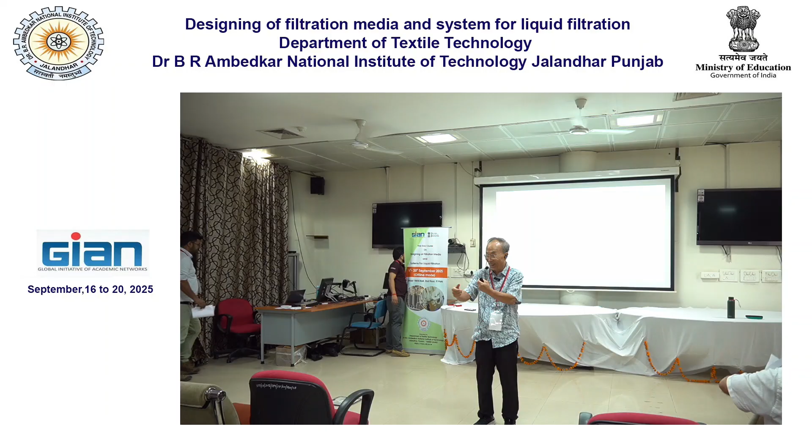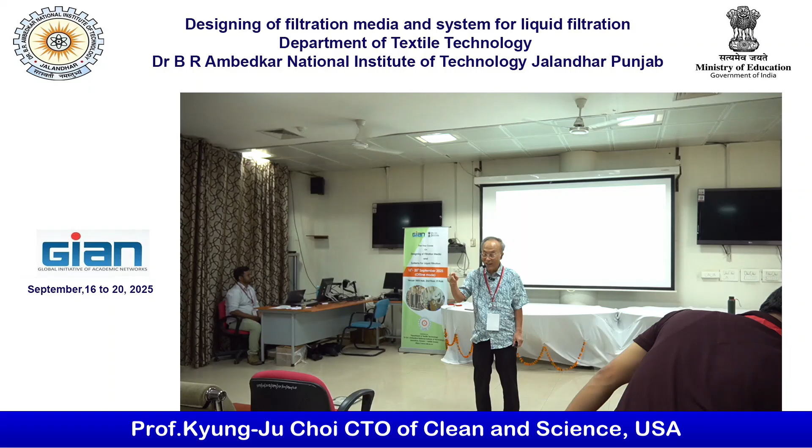But one thing, when I look at it, it's really quite interesting. Why? The route that I take to come to Jalandhar: US to Europe, Paris, and then to Jalandhar. I don't know why they are not looking at the other side of it, which means US to an Asian country, and then Jalandhar. Well, distance-wise, it's the same. However, there is not that type of route. So if that were available, then probably I would take that one.

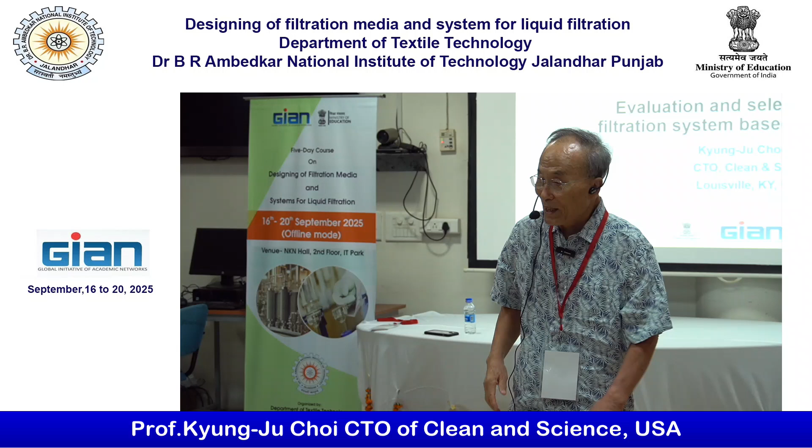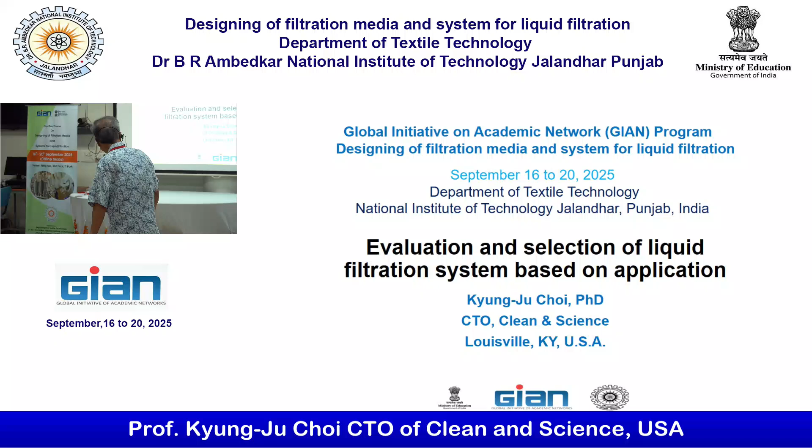Okay, today, this is really not a short kind of lecture, because it's evaluation and selection of liquid filtration systems based on application. However, I have only a small area of expertise, not all of the expertise. There is no way you can do it. So we're going to cover the areas available in liquid filtration. That's the first part of it. The second part, that is quite interesting, I believe, interesting to you.

Have you heard of MBR, a process for wastewater treatment? Have you heard of it? Membrane bioreactor. So we're going to go over that. There are also other recent technologies, so we're going to go over recent technologies being applied in wastewater treatment. I don't think anyone has covered MBR or some of the newest technology. That's why I told you yesterday you're lucky, because you're going to learn the newest technology available.

Then how do you select a liquid filtration system? This is the filtration system. First, you have to define the application requirement, the type of water or liquid, whether it's water or chemicals or food, beverage, pharmaceutical. The water: potable, wastewater, seawater.

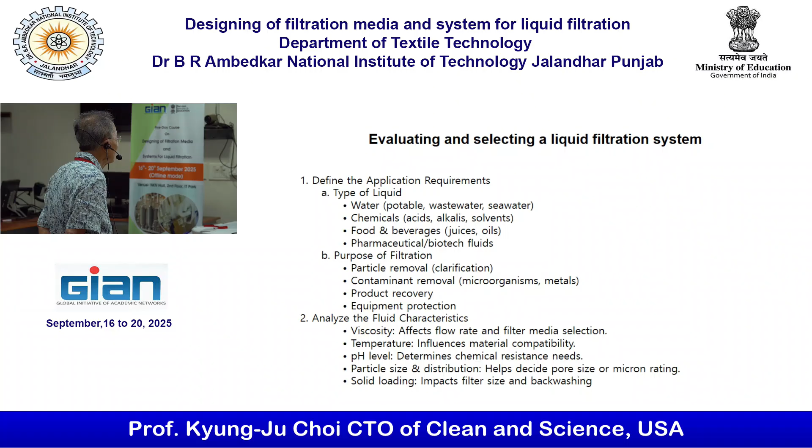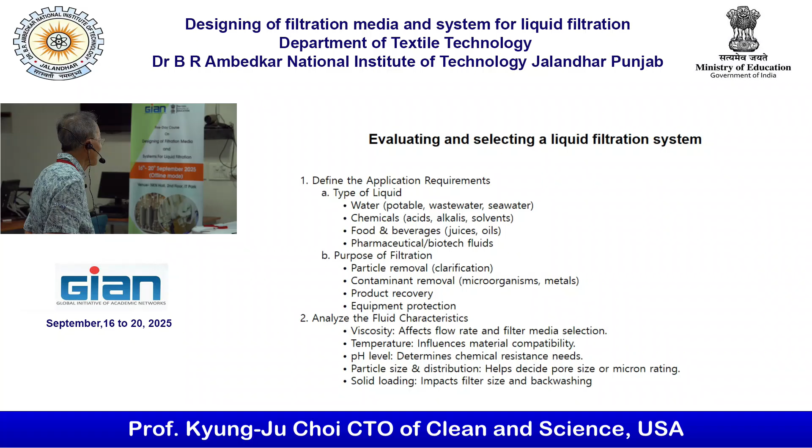And then third one, determine the filtration requirements. Certainly this is efficiency related. And flow rate is important. The operating pressure, well, pressure and flow rate, are critically important. Compared with air, for liquid the pressure is a really important parameter. Just like the previous lecture, is it continuous or batch? Then how can we clean the system itself? That's the important part of it.

And number 4, select the filter type. What type? By configuration: bag filter, cartridge, self-cleaning, or membrane filter, micro or ultra, cellulose depth filter. And then mechanism: surface filtration, depth filtration.

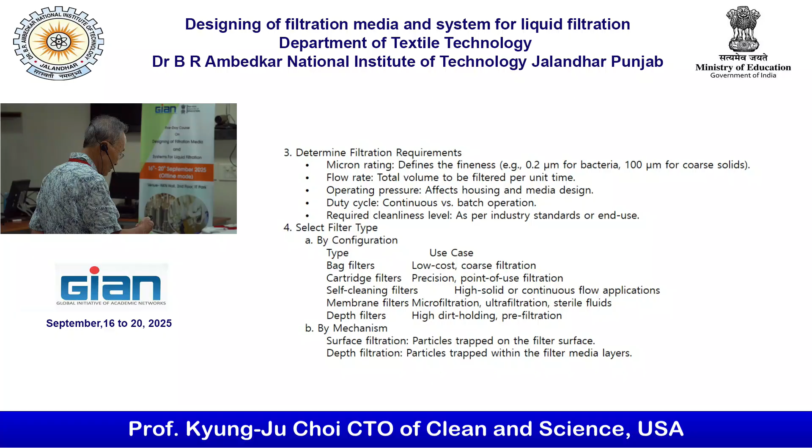Now, fifth, material compatibility. This is quite important. Compatibility with the solution that you want to use. When I worked for Cummins Engine Company, we tried to develop lube oil filter media, also gasoline fuel filters, hydraulic filters. Then you have to look at the compatibility. If it dissolves a little bit, then you have trouble. Cooling water is trouble. Cooling water actually has really high alcohol content. So the alcohol dissolves some of the materials, organic materials. So compatibility is quite an important factor.

And then what type of housing? The operation and economic factors. The economic factor normally comes first, whether this one is expensive to make or not. Certainly the maintenance issue, change out, disposal. Now disposal is a big issue. Luckily, in the US, we are still dumping it in landfills only, because land is huge, but in India, I doubt it. So disposal is a big issue.

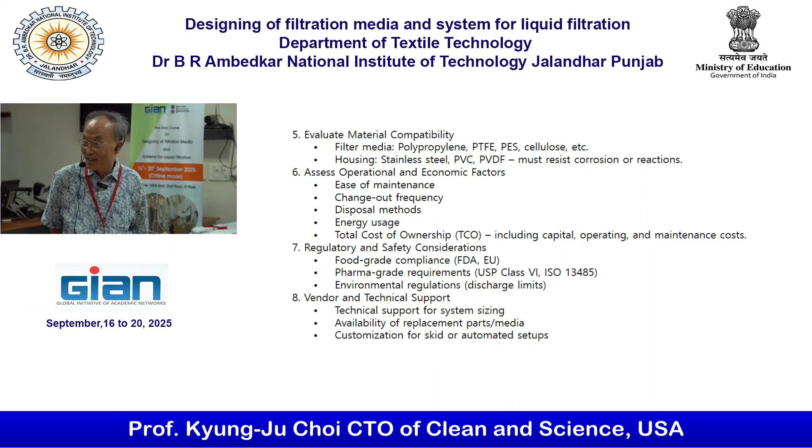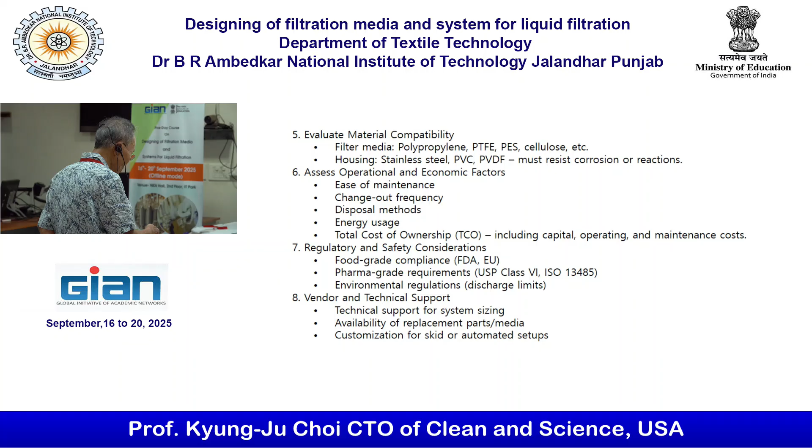And then this one is an important factor, regulatory and safety considerations, whether it's food grade, pharmaceutical grade, environmental regulation. Currently, there are so many regulations on water and everything. Another one is vendor and technical support. So these are all necessary items to look at. Here, evaluating liquid filtration by application. For bag filters, the cost is really low. What about cartridge filters? It's moderate. Sand filter, quite low.

This afternoon, tutorial 2, I'm going to start with the sand filter, the example of sand filter. I don't know whether you have the copy of the ebook. Do you have it? Not yet. Not yet.

So it starts with the sand filter, Fuji Mountain. Any person who actually visited Fuji Mountain in Japan? See, I traveled there several times because I have a project with them. That's really close to Fuji Mountain. Around that area, there is a bunch of so-called clean water.

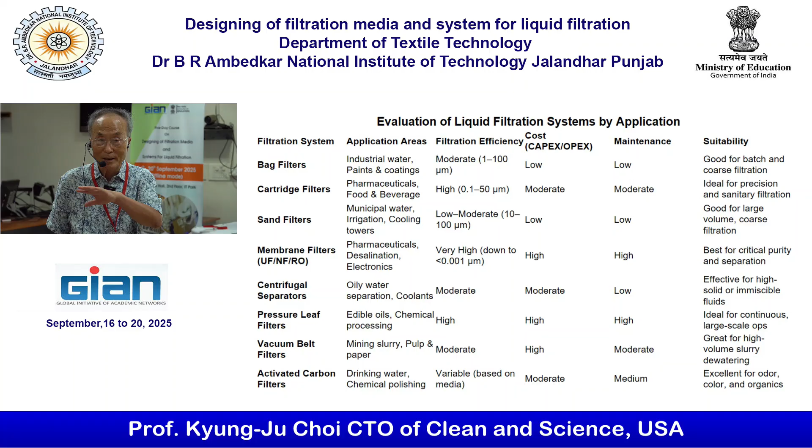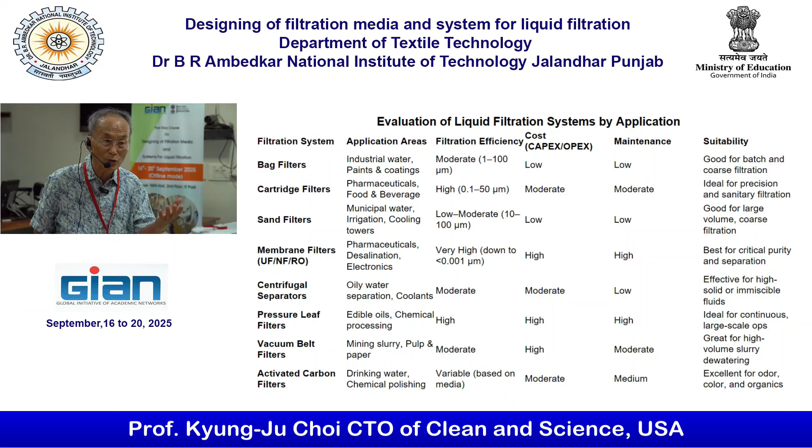And then sand filter. Sand filter is the original filter material, but we're still using it. And the membrane filter and centrifugal separator. However, the bad part of membrane is cost. Cost is quite high. There is one lecture about the membrane. I'm actually looking at the manufacturing side of it, how we can produce the membranes. There are several different types of membranes, so we want to go over how they can manufacture something like that. Centrifugal and pressure leaf.

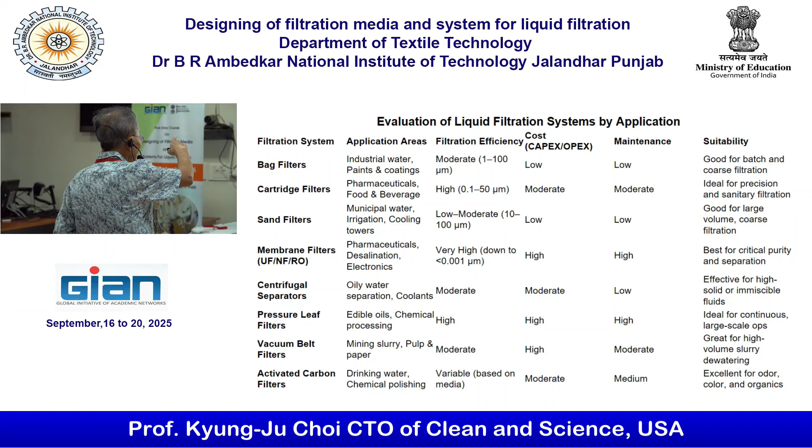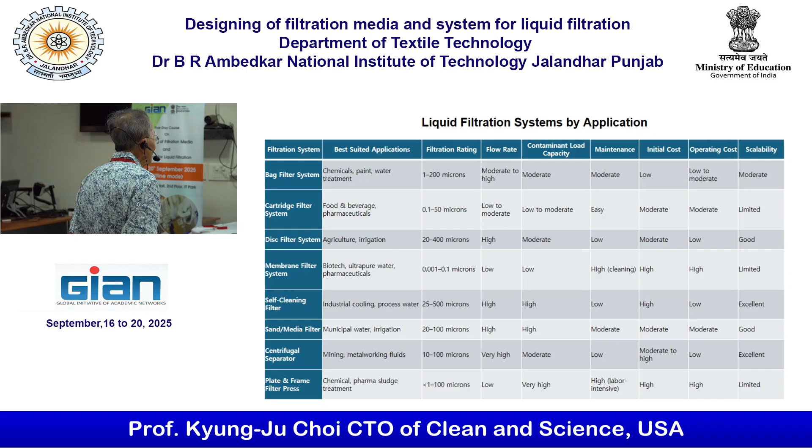Vacuum belt. So application area, industrial water and pharmaceutical, you can look at it. This chart is quite handy. If you like to design something, I don't want to go over every bit of it, but once you have this slide, if you have a project, you can look it up and get the right answer. This one is a little bit different. This one has the operational cost, scalability, flow rate, and filtration rating as well.

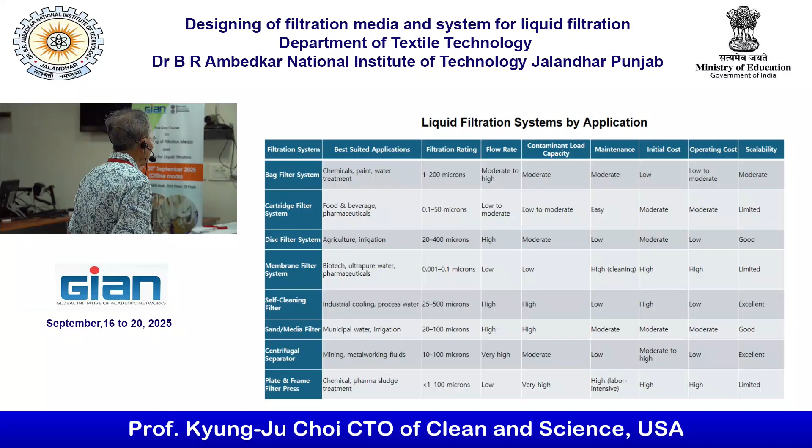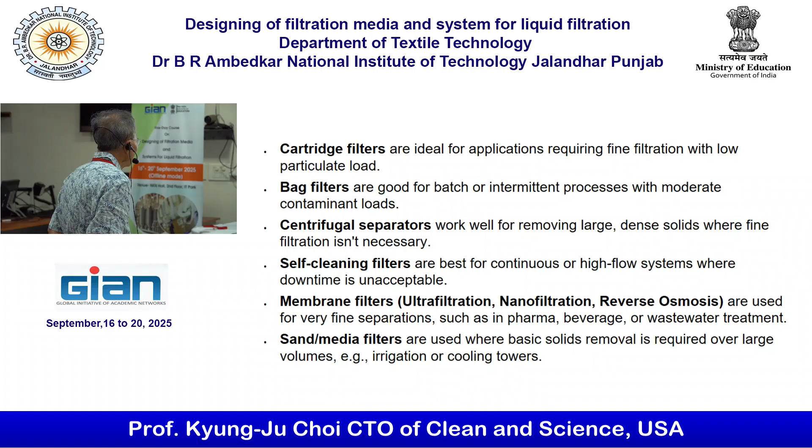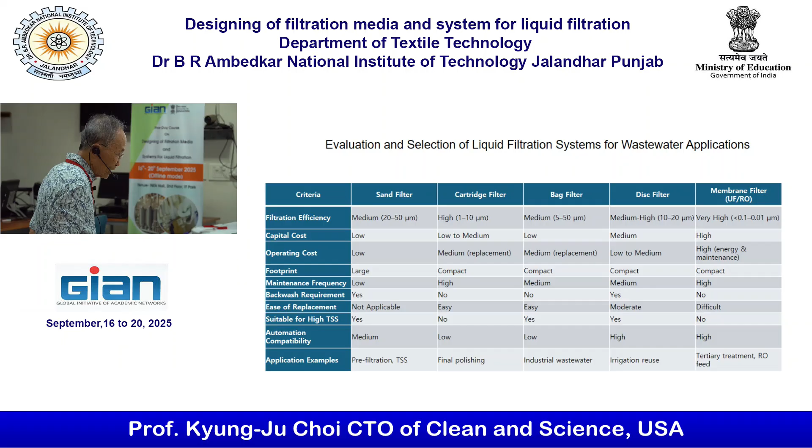Pre-filtration, and final one. I'm going to skip two. Selection of liquid filtration system for chemical plant application. The efficiency is an important one, solid handling and flow rate. Chemical compatibility is quite important. Here, footprint, the carbon footprint is quite a buzzword right now.

Do you know what the carbon footprint is? What is that? Carbon dioxide that is being emitted. It's the amount of carbon dioxide that is being emitted in each activity, let's say. Yeah. And it's expressed in tonnage. Yes, carbon footprint is currently the buzzword. Disposal is a big issue. So also, I'm going to talk about sustainable filter media development.

But surprisingly, the carbon footprint is quite a big issue in Europe and Asia. However, in the US, we are not actually paying much attention to the carbon footprint. But in Europe it's a big issue. Also, the Asian region is the same thing. But since I'm living in the US, we really don't care much. Can I ask you why you don't care about carbon footprint? Every area, I'm going to talk a little bit about it. Every area, in US, certainly.

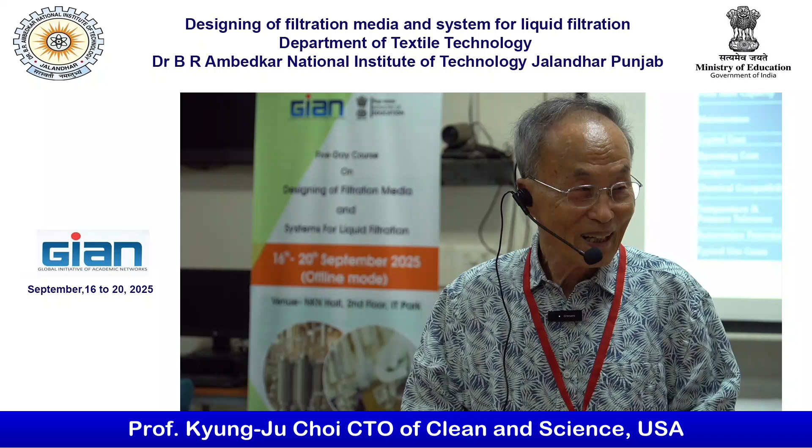US consumption for energy is much higher. So why do they project that there is a problem? The issue is that in the US, even inside the room, they are using air conditioning always, even though outside climate is quite good. But in India that will never happen - if the outside climate is good, no one will use the AC. My son is living in US, he is inside the room and the AC is running continuously, but outside climate is quite good. That will not happen in India where energy cost is very high. So they don't want to show their energy cost, because the more energy consumption, the greater the problem with carbon footprint.

Yes, that is the weak point - they don't want to show their weak point. And they are the major consumers, the major consumption for energy.

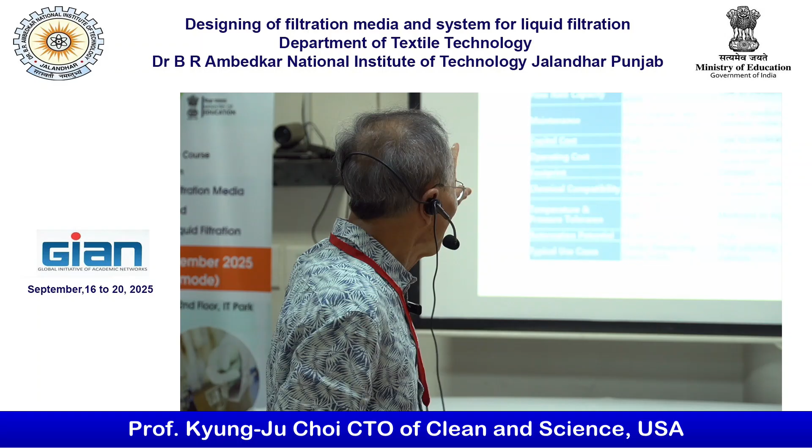But India also has a problem, particularly in the environmental part. India is lagging far behind. China improved a lot with time - initially China was at the top, but now China has improved a lot, and India is behind, if you look at the environmental part, water pollution, air pollution. That is actually a big part of the evaluation and selection of the liquid filtration system. You have to follow government regulation first. In the US, we don't have a lot of restriction, but India is different.

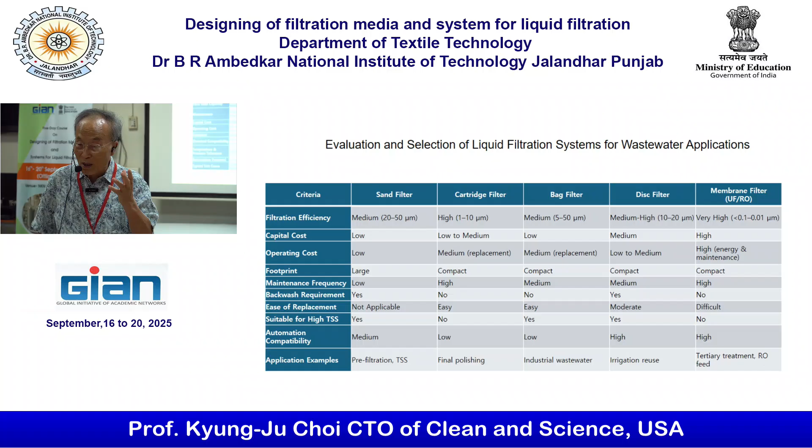Last time when I was here, I talked about the PTFE, ePTFE membrane. But one professor asked me, 'ePTFE is one of the PFAS, which means what they call everlasting material - there is no way you can degrade it, it's not degrading, staying forever. Also, it has some bad material coming out that can harm the human body, something like that.' But actually, I never heard of something like that in the US. When I was speaking about PTFE, one professor asked me, 'this is bad material in the future.' I didn't understand that, but still, if you don't have PTFE or ePTFE, then you get big trouble in the medical field and some other fields. So certainly I'm going to go over that topic in the sustainable material development section.

Since I'm living in US and coming to Jalandhar, some portions I really don't understand, but that's reality - I have to go by the reality.

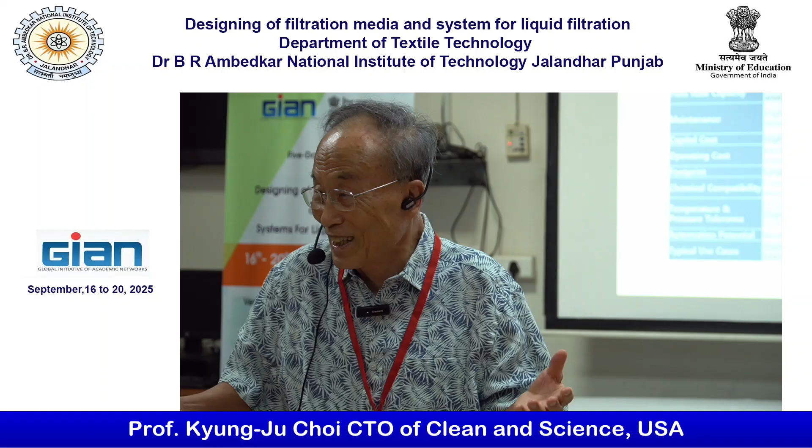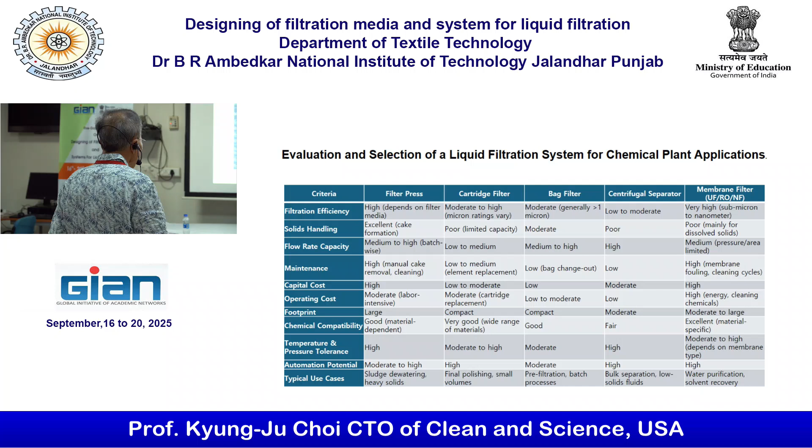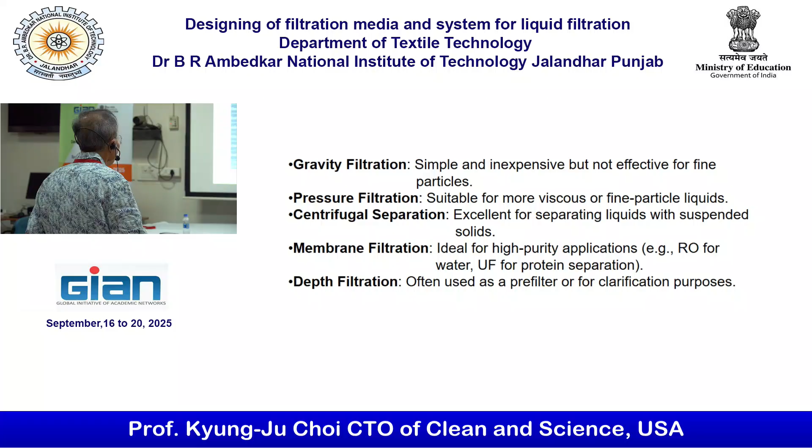Liquid filtration separation for food processing is slightly different from chemical plant applications, but not really a lot different. He already covered all of those. For membrane filtration, I have one course, one lecture - is that tomorrow or some other time? It's pharmaceutical. It's almost the same, but slightly different for the application.

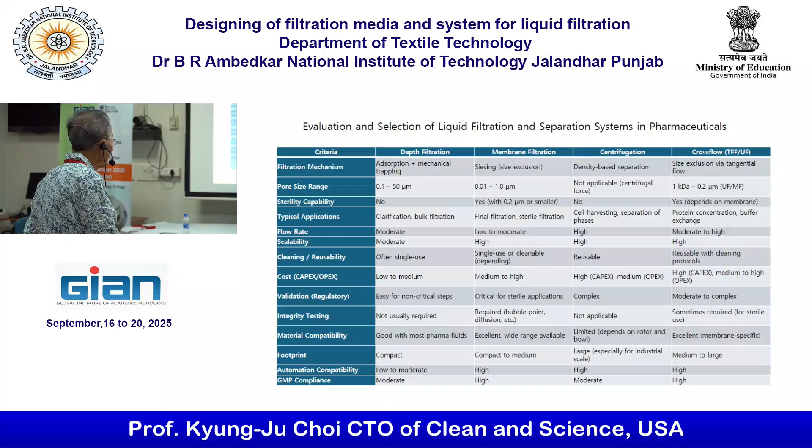Now we're going to go into the main topics. The interesting areas are DAF, MBR, and ASP. The dissolved air flotation topic I already covered yesterday. But membrane bioreactor, I have several slides to talk about this one so you can get some outline of what's going on. And the other one is the activated sludge processing, ASP, which is a new area as well. So those three areas are current technology to treat wastewater.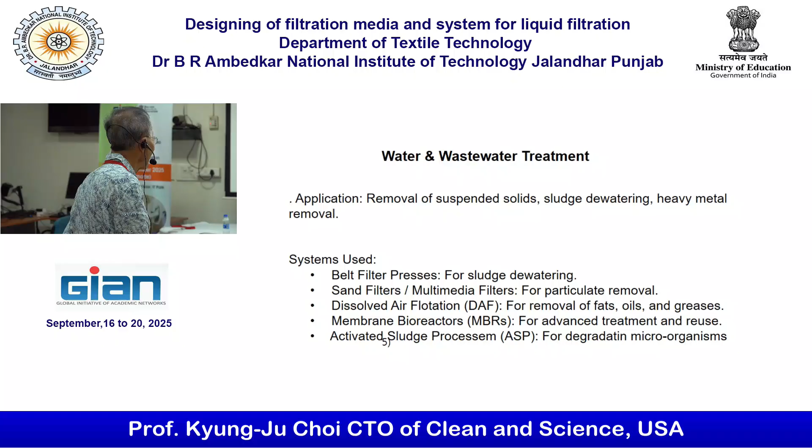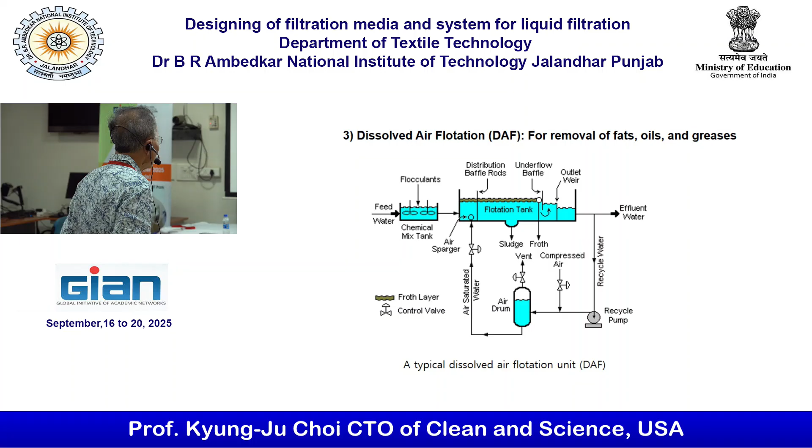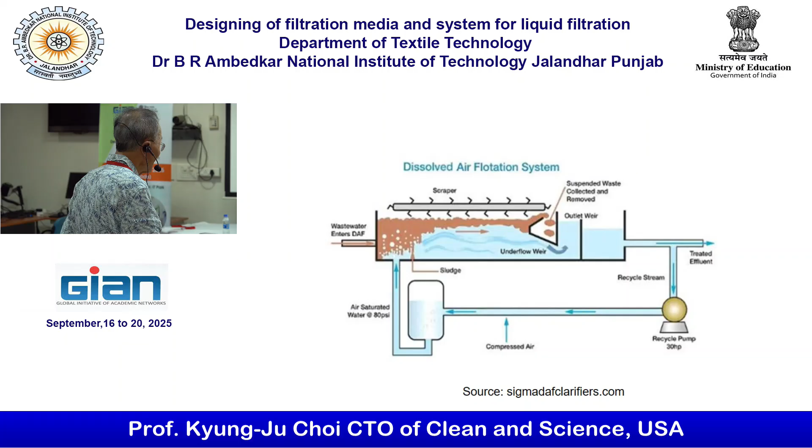Wastewater coming in, and then somehow we have to introduce some air into it, make bubbles, and then you eliminate suspended waste. DAF removes total suspended solids, TSS - quite an important terminology - total suspended solid, biochemical oxygen demand (BOD) is another one, oil and grease waste. The contaminants are removed using dissolved air in a water solution produced by injecting air, as you saw in the previous picture. Injecting air under pressure into a recycled stream of clarified DAF. The feed water to the DAF float tank, often, not always, uses coagulant such as ferric chloride, aluminum sulfate. This is quite the common material for coagulant, which we're going to go over a little bit in the afternoon session.

He already showed you the picture of water using coagulant. The portion of the clarified effluent water leaving the DAF tank is pumped into a small pressure vessel called an air drum, into which compressed air is also introduced, saturating and pressurizing the effluent water with air. The air-saturated water stream is recycled.

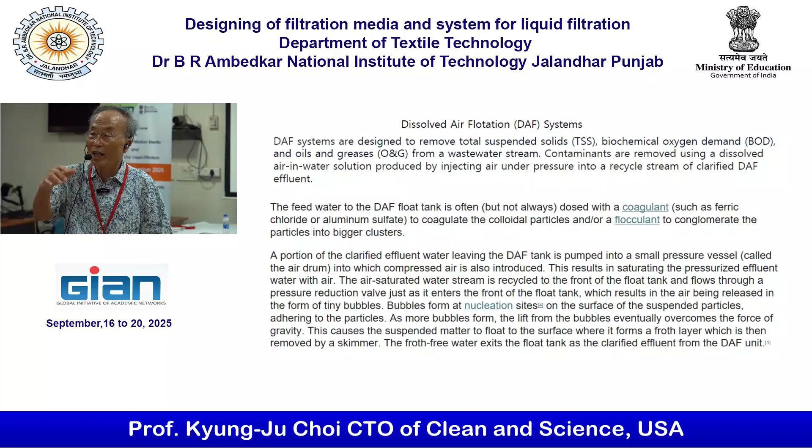Bubble forms at the nucleation site. The terminology: nucleation has to come first, then crystallization occurs. So nucleation is quite important - you have to create nucleation. What is nucleating? You have a solution, and you introduce some nucleating agent, one drop of it. Then somehow it creates solid material from the liquid - that's why we call it nucleating. Then crystallization occurs and you can form crystals. That crystal contains certain ingredients from the solution, so you can separate them out. So nucleation is quite important terminology.

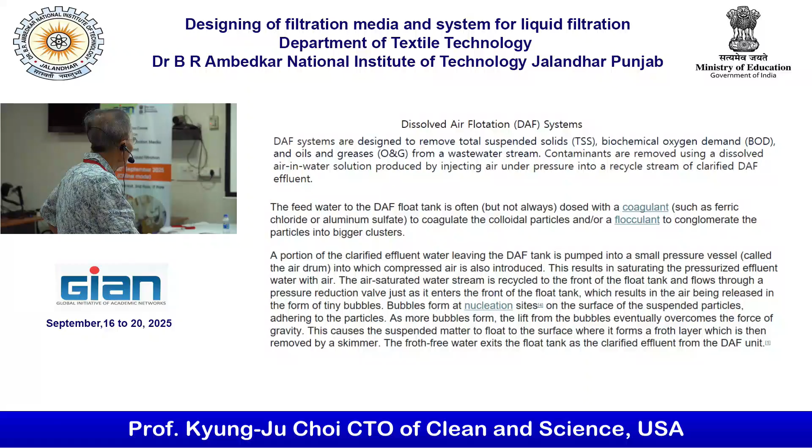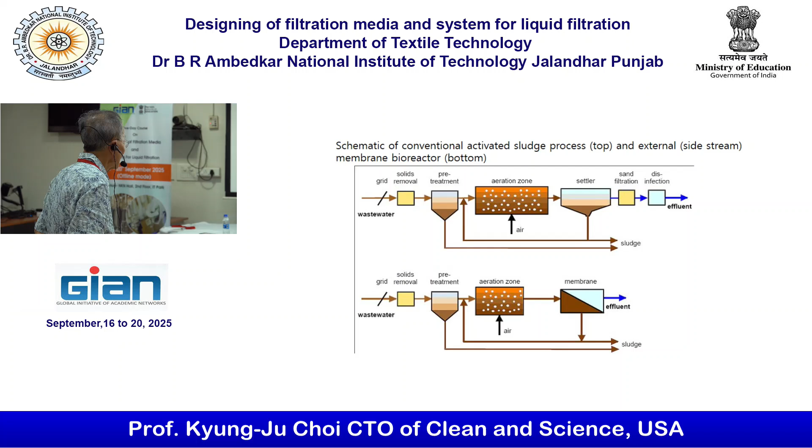This is the simple schematic of how the bioreactor works. In waste treatment, you have to kill some germs inside the water. How do we do it? Somehow you have to introduce gas molecules. Once you use gas molecules, the gas has to go out. Then somehow there is a reaction to make NO2 from N. So anything in the water, something you can exhaust out of it.

You have to kill the germs first, and then somehow the rest of the material has to be recirculated. That is the dissolved material. The easy way to say it: you have to grab, kill, or deactivate the microorganisms, and then use membrane, and you can get clean water out of the wastewater.

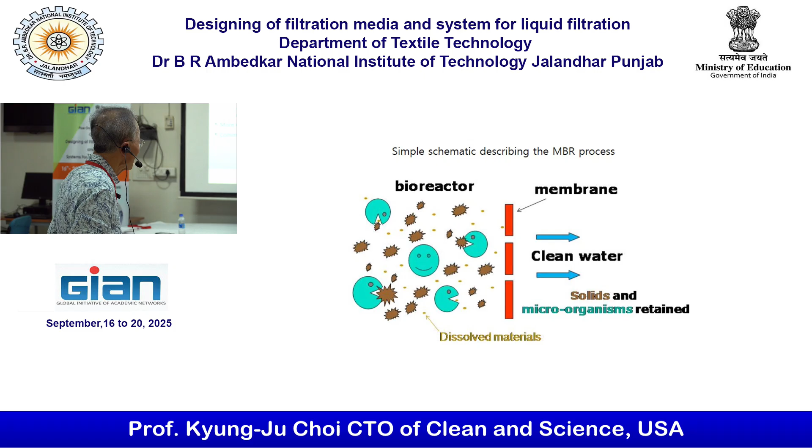However, currently most wastewater treatment plants do use MBR. Why is that? Most water treatment plants - why is that? You have to ask when I finish this slide.

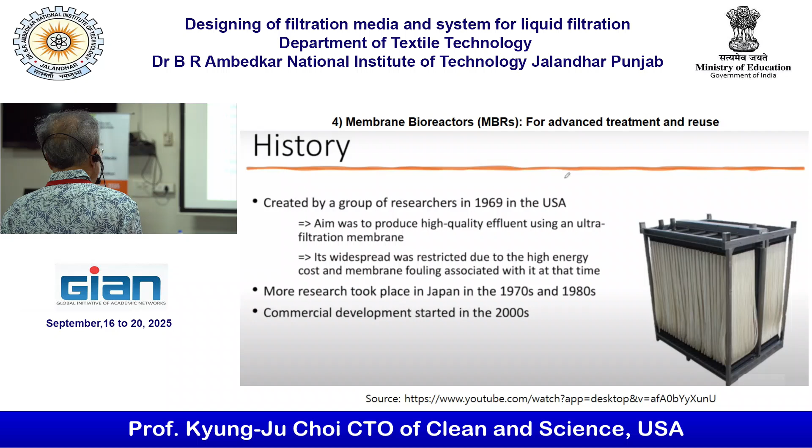The membrane bioreactor has emerged in wastewater treatment technology as a choice replacing the activated sludge process, ASP, with MBR - one of the most important innovations in wastewater treatment. That is true.

The microfiltration and ultrafiltration membrane technology has pore size ranging from 0.05 to 0.4 micrometer, currently widely used in municipal and industrial wastewater treatment. I believe India uses this - I strongly believe, because in India you need this. There's less area requirement and excellent effluent quality compared with ASP. But membrane fouling is always a problem, and certainly it's a high cost issue.

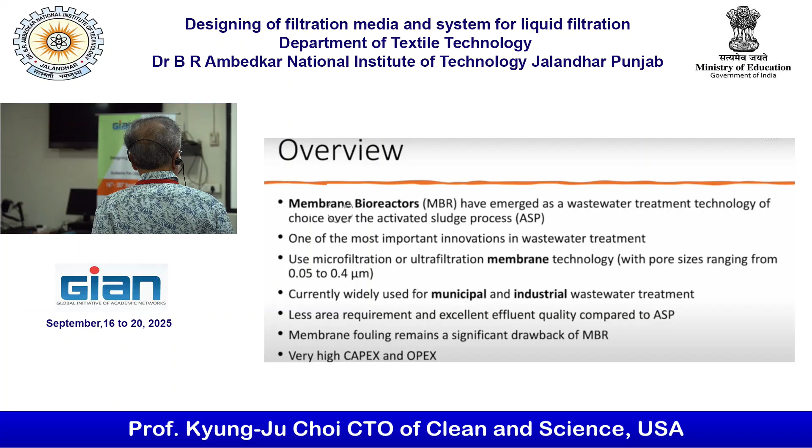He already covered this, but this is a little bit different. Microfiltration and ultrafiltration can remove small colloids, viruses, bacteria. Nanofiltration removes dissolved organic matter and divalent ions, and ion-specific removal uses reverse osmosis.

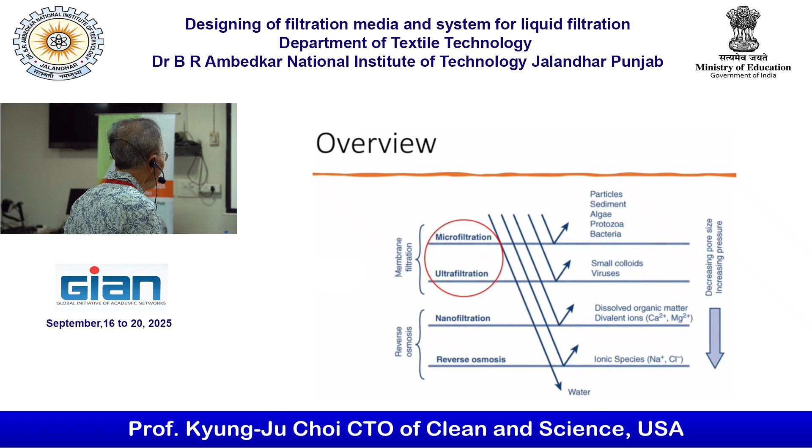This is the schematic - we're going to go over the anoxic biozone and aerobic biozone, both in detail. Pre-screening normally uses wire mesh, then biological treatment, membrane separation, and then you get the clean effluent.

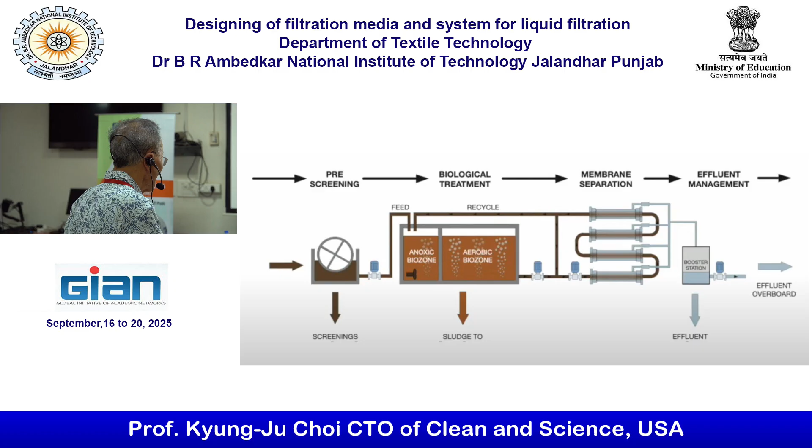So what is the anoxic biozone or aerobic biozone? It looks like this. It happens during the anoxic biozone environment - low oxygen, but nitrate NO3 is present. The main process is denitrification by microorganisms, where facultative anaerobic bacteria convert NO3 into N2. This actually removes ammonia.

What about the aerobic biozone? The main process is carbon oxidation, nitrification, and sometimes phosphorus removal. The function is breakdown of organic matter - this is quite important, all the organic matter breaks down, which deactivates ammonia, and in biological phosphorus removal, some phosphorus can be removed.

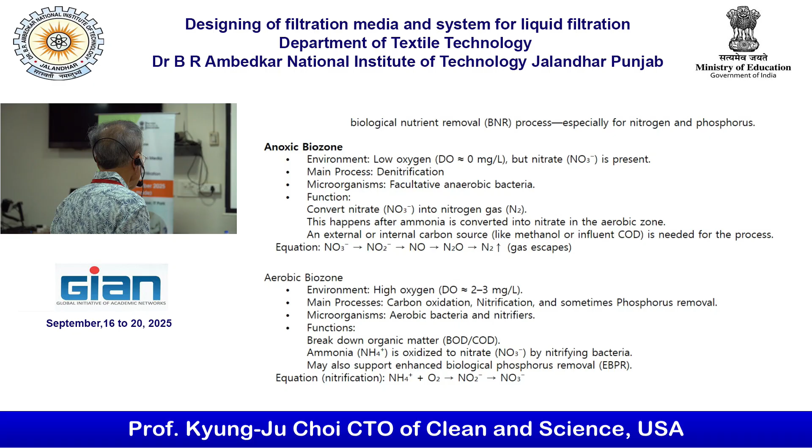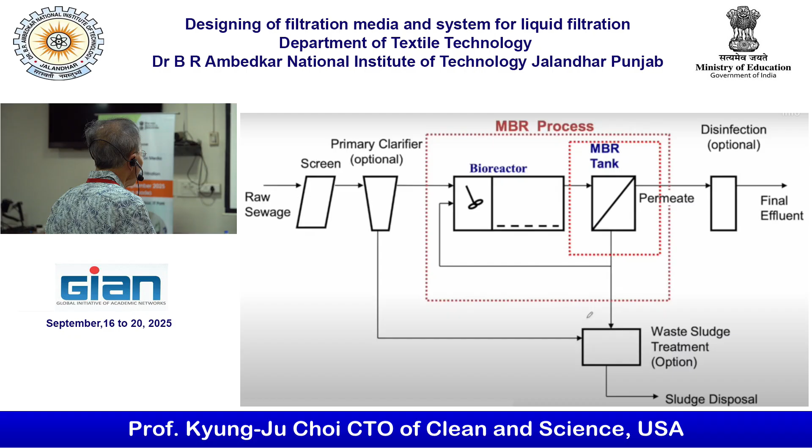So here the screen comes in, and primary clarifier, then you go through the bioreactor, and then the MBR tank - that's what we are seeing. It's going backward - yeah, right there. You see the aerobic stage, and the MBR module is back there.

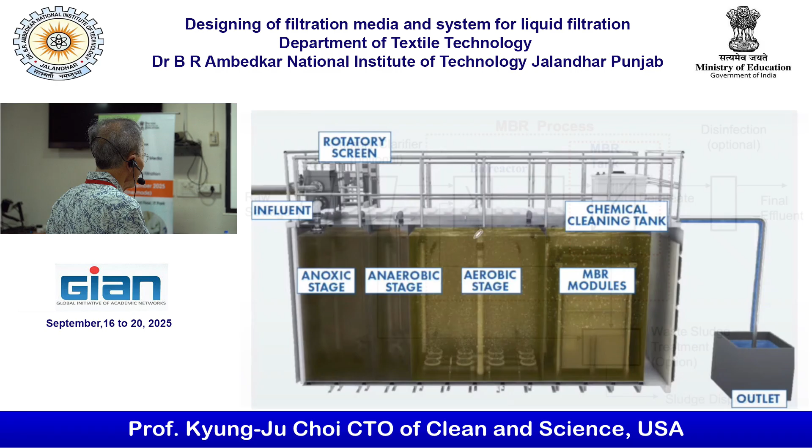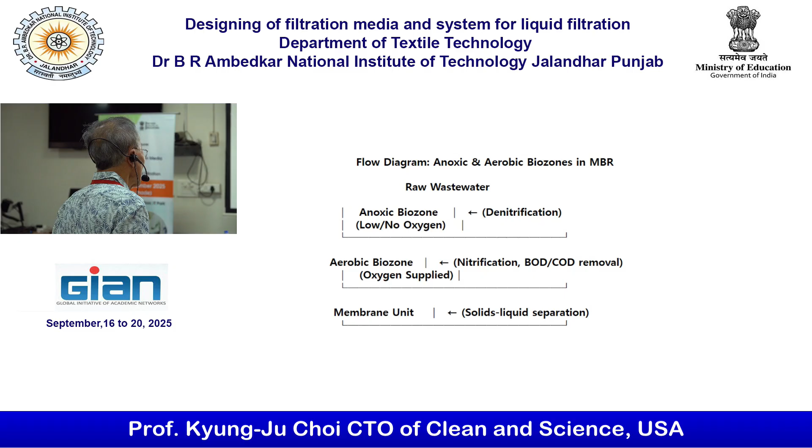So the anoxic biozone uses no aeration, oxygen absent, and uses denitrification, converting nitrate to nitrogen gas, which will return activated sludge recycled from the aerobic tank to remove nitrogen. The final stage is the membrane, which physically separates treated water from biomass.

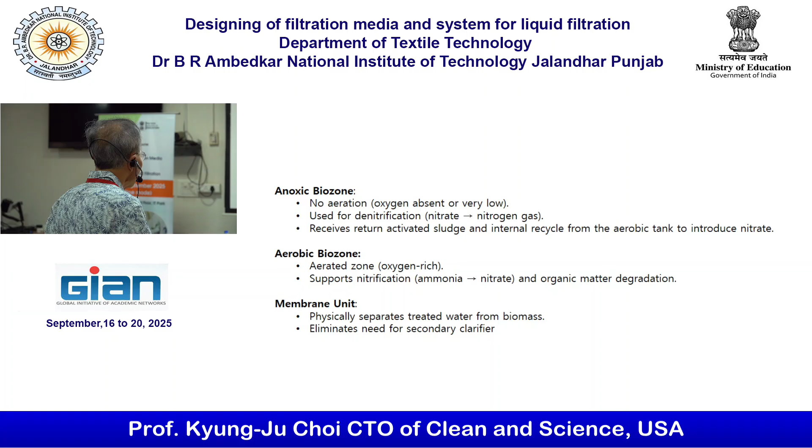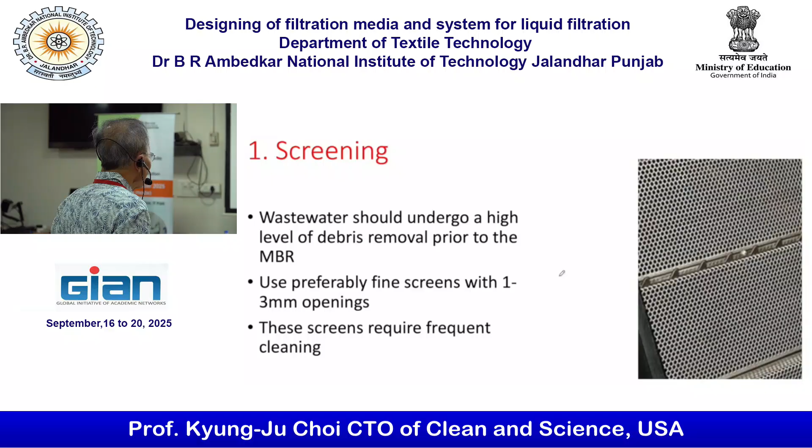It's detailed wastewater treatment. I believe you've already seen the screening step, which is really common for wastewater treatment. And then, I'm not sure how to pronounce it - anoxic.

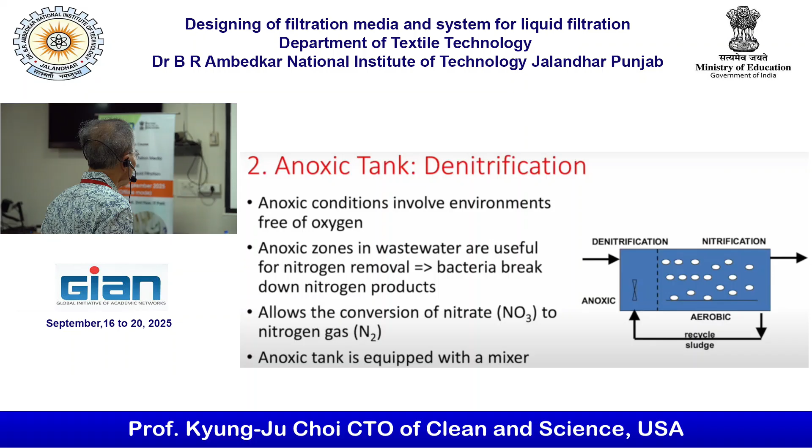Next step is the aerobic tank - nitrification. This creates aerobic conditions by diffusing air, which we already covered. So nitrification takes place, and ammonium is converted to NO3. Wastewater has a lot of ammonia, so you need to get rid of that.

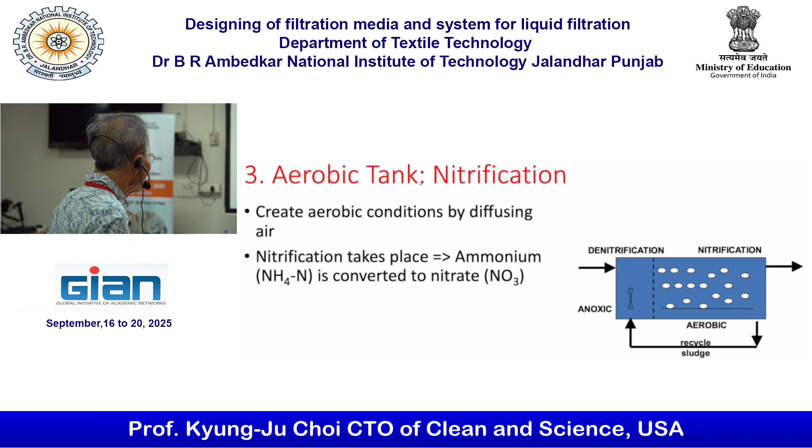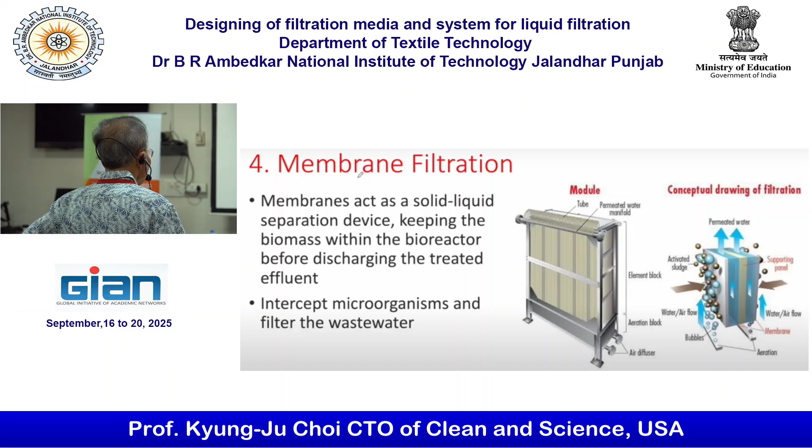And membrane filtration - there's a cartoon on the right hand side showing the sludge and water bubbles. This is the membrane, more common in industrial settings, versus the other which is more common in municipal water settings. In municipal water it's a slightly different MBR system than the industrial setting. The membrane module is right there; here, the membrane module is inside. That's the difference.

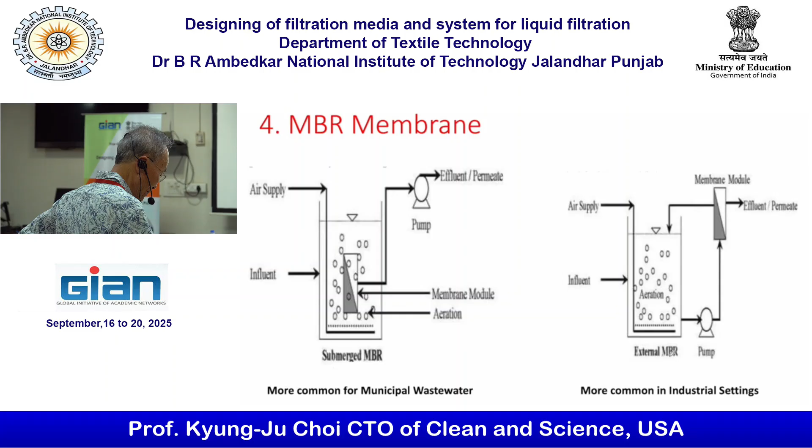Application: water, wastewater. Probably this is a big area for wastewater.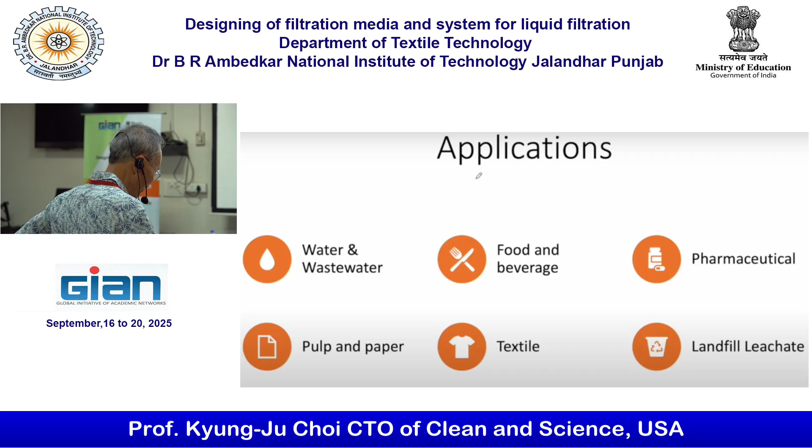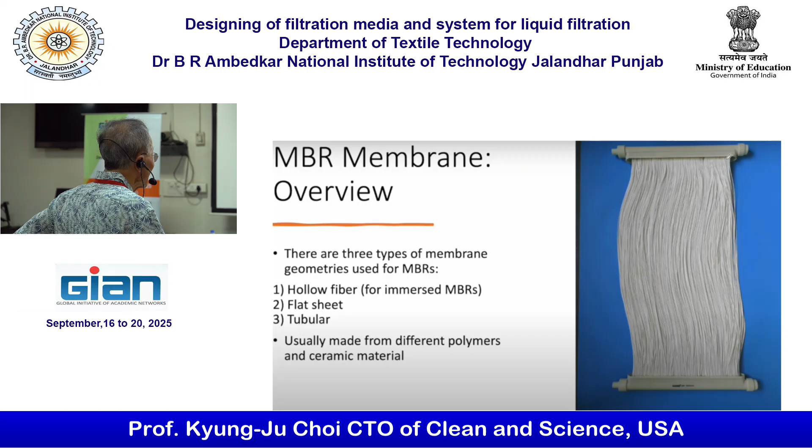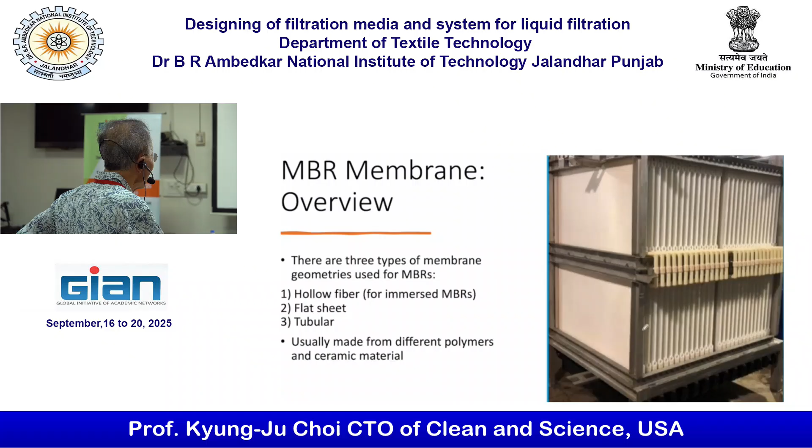There are three types of membrane: hollow fiber, which he already covered, flat sheet, and tubular. I don't know whether you can see the difference, you have to look at the picture. Professor McLeod probably showed this one. In fact, they use a lot of ceramic material like this - hollow fiber, flat, tubular.

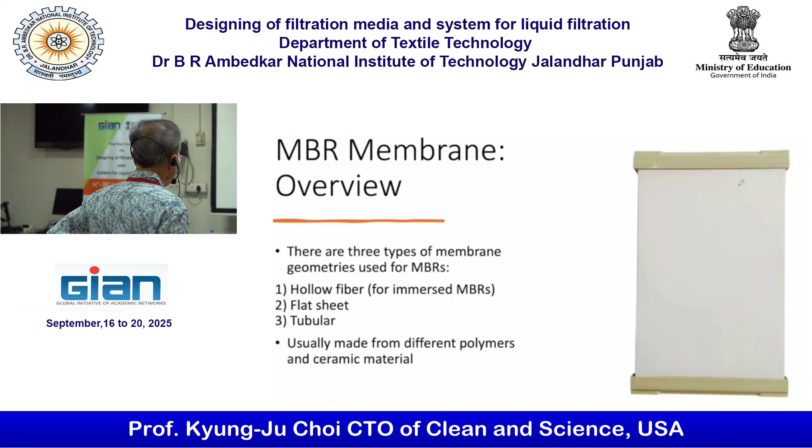How do you want to clean it? Clogging is always the issue. Physical cleaning is conducted by back flushing the membrane - this is a really common method. During the relaxed period, permeate withdrawal is stopped so that the air scour can wash solids off. Then there's chemical cleaning, which he already covered.

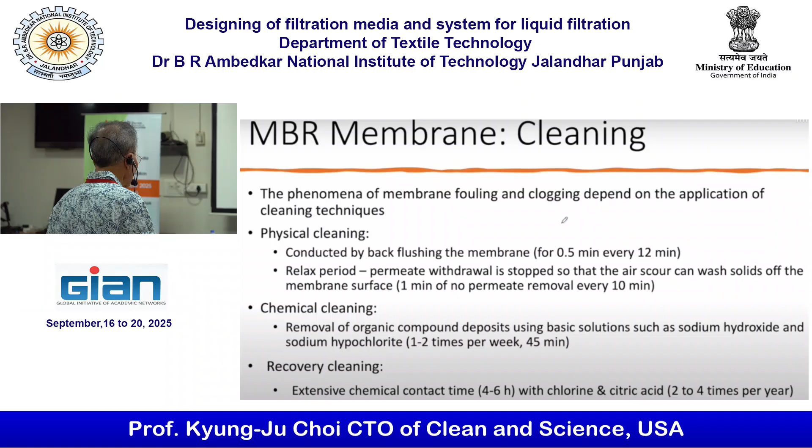And here's some removal efficiency data - suspended solids, effluents, BOD, phosphorus, and total nitrogen.

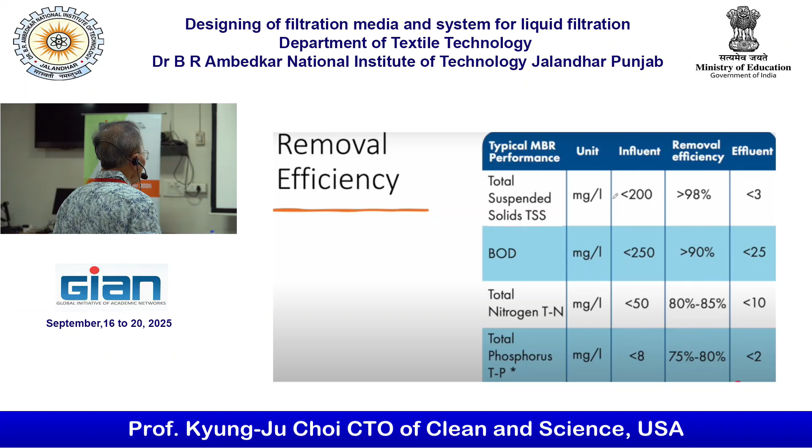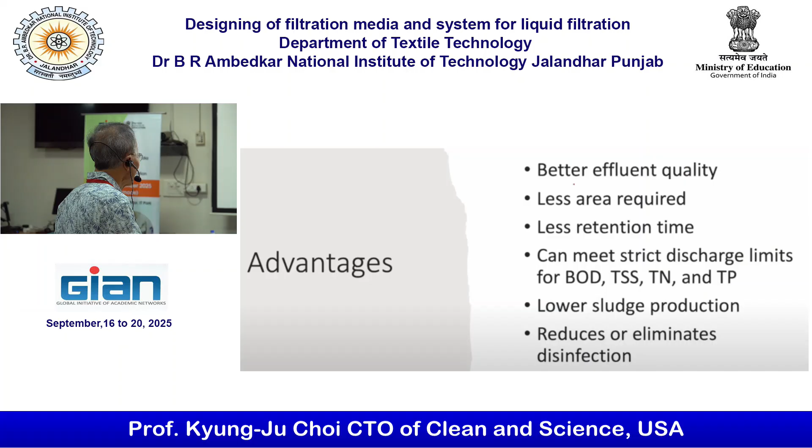Disinfection. Disadvantage certainly is high capital cost. So the most important thing is operating - the operator must know how it works, so the operator is quite an important part of it. Complexity of the process is mainly due to membrane maintenance and cleanliness.

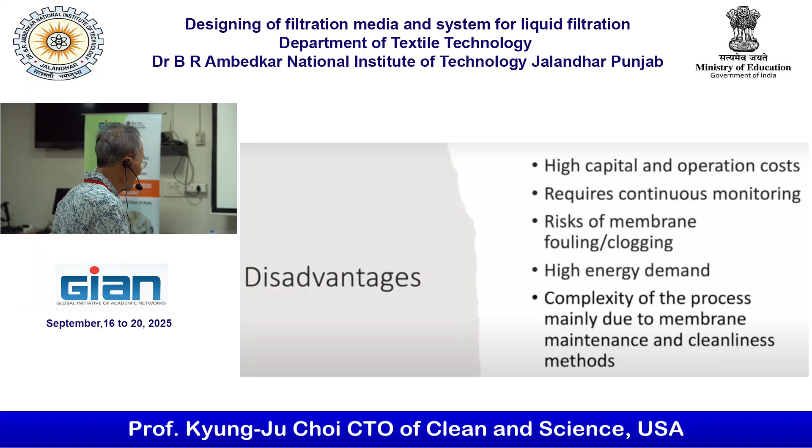This is a bit different area - the activated sludge process, ASP process.

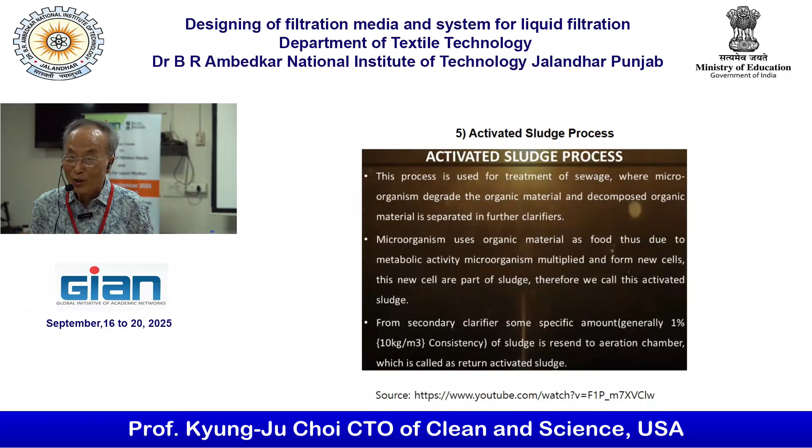So once you've got your material using the slides, there's a video coming out that will help you understand it better. So everywhere I put the slides there, you have to look at it that way. I did not know that in India we can use YouTube video - if I knew before, I could have put it in. But in the US we cannot use it.

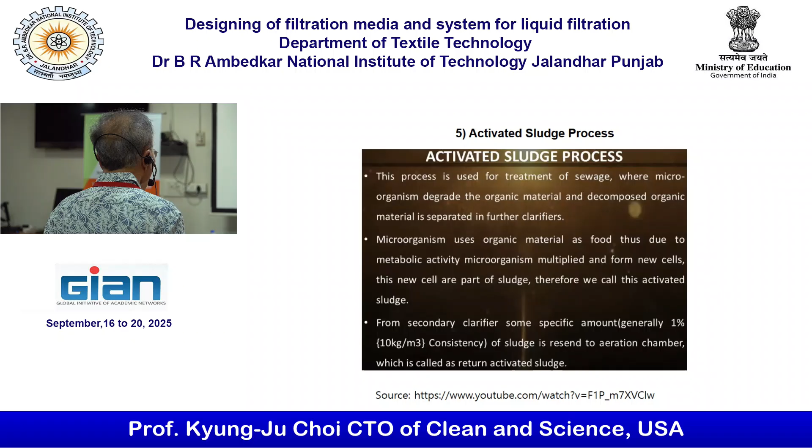This process is used for treating sewage where microorganisms degrade organic material, decomposing it for separation in the further clarifier. So the important issue is how we can deactivate the virus and bacteria, and that's quite an important issue.

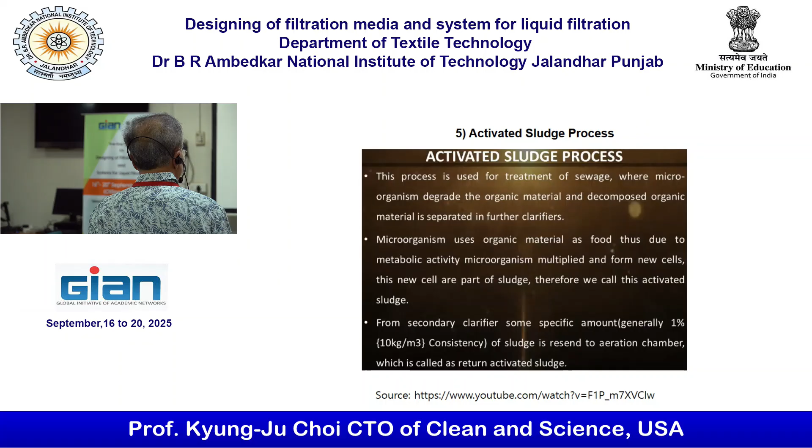This is the activated sludge process. Sewage goes through screening and grit removal, which you already know, then a primary clarifier. Some portion which is the drainage comes down here and filtrates, then the aeration tank and sludge, followed by sludge dewatering. The upper effluent goes to the aeration tank and secondary clarifier, then disinfection, and you get the treated water.

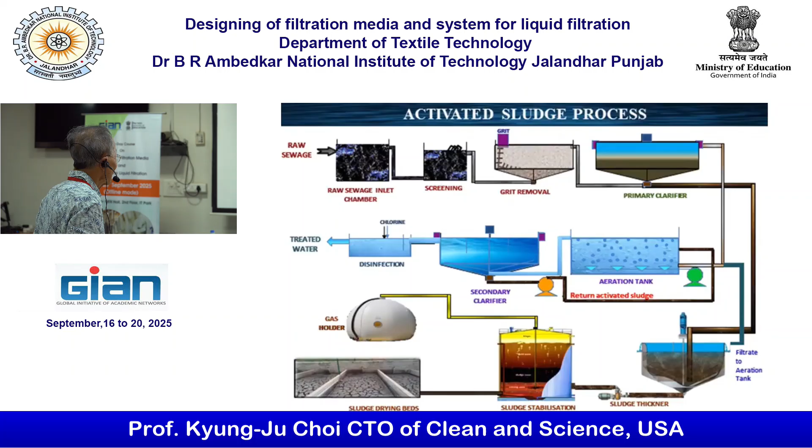Typical characteristics of domestic sewage - this is not India, this is US data.

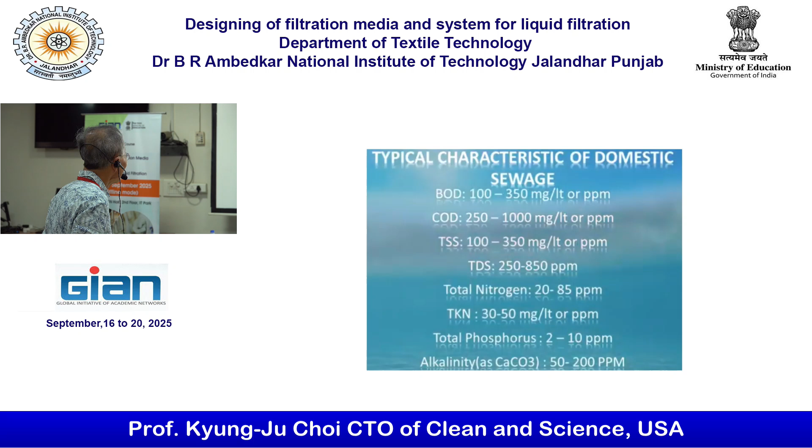This one is a kind of summary of the previous slides - wastewater treatment to assess quality treatability. Wastewater BOD, biochemical oxygen demand. And then COD, chemical oxygen demand. And TSS, which we already covered, total suspended solid. TDS, total dissolved solid. Here's another one, TKN - I'm not sure what that is.

I have to look it up, but I forgot to. It's the total amount of organic and inorganic nitrogen compounds in the wastewater. Biochemical oxygen demand over 5 days, chemical oxygen demand, total suspended solid.

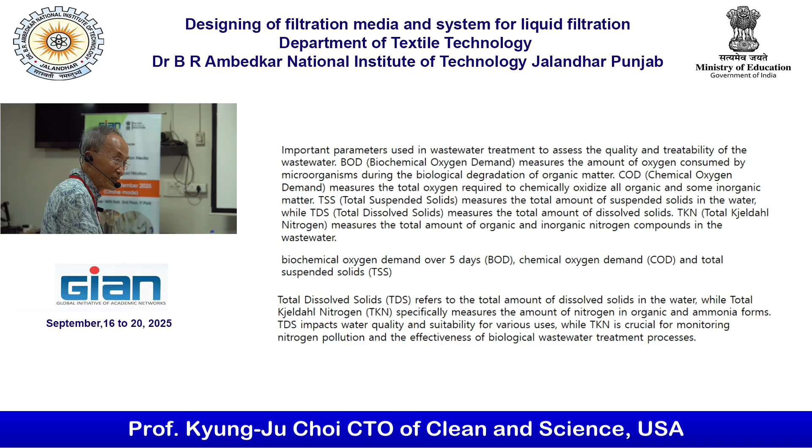You can look at it. I think that's the final slide I have. But the important thing is the MBR, membrane bioreactor - that's the important message I'd like to give you.